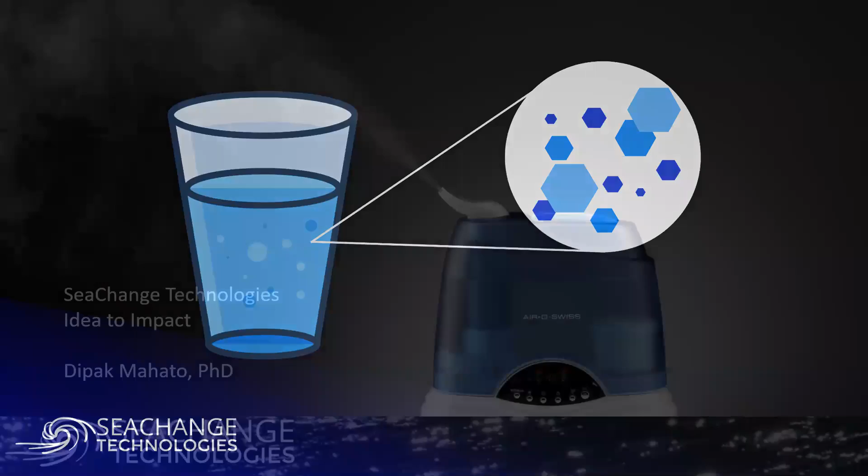What I'd like to describe to you today is a little bit about how we've taken this idea about a novel way to treat wastewater to hopefully further it along to where we can have a real world impact, delivering environmental and economic benefits to our industry. And so I'm going to focus a little less today on the technicals of how the actual technology works, and more on how we got here and some particulars about how we got this pilot going with Fashion for Good and partners.

So I started this just generally. I wanted to give a little more background on our story and how we got here, because I think we may have some very early innovators here also. But this was my first startup, and it started with an idea, as you saw. Some of you might recognize this device. This is called a humidifier, and what it does is when the air gets very hot and dry in the house, we use this thing to get more humidity. And I was just sitting at home one day watching this thing, and I had this idea about how to purify water, based on turning water into an aerosol and extracting the contaminants.

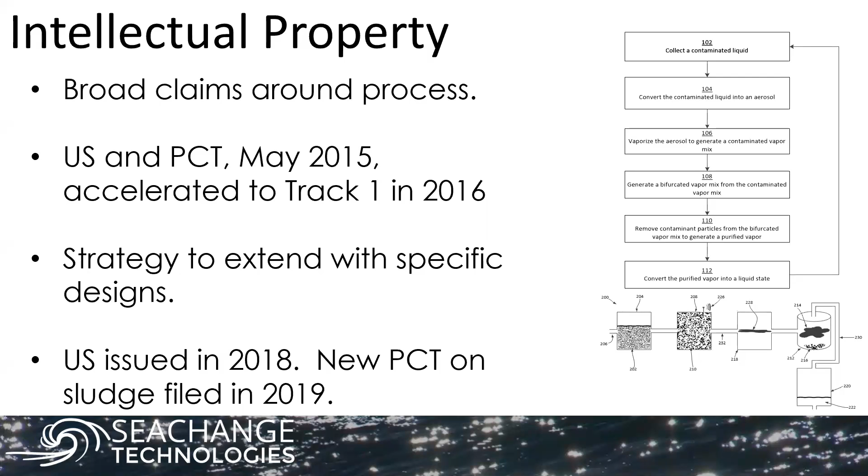And this did a couple of things. Doing this early allowed us to, first of all, the US patent issued in 2018, and we've been working on extending that IP globally and with different designs and technologies since then. And so we have a pretty strong foundation, which is great. The other thing that this allowed me to do is actually talk to people. And that's really important to get out there, actually share the idea and the technology, because otherwise you can't really dive into how this could be a viable solution for anybody. And so this was our approach to being able to get out into the real world as quickly as we could.

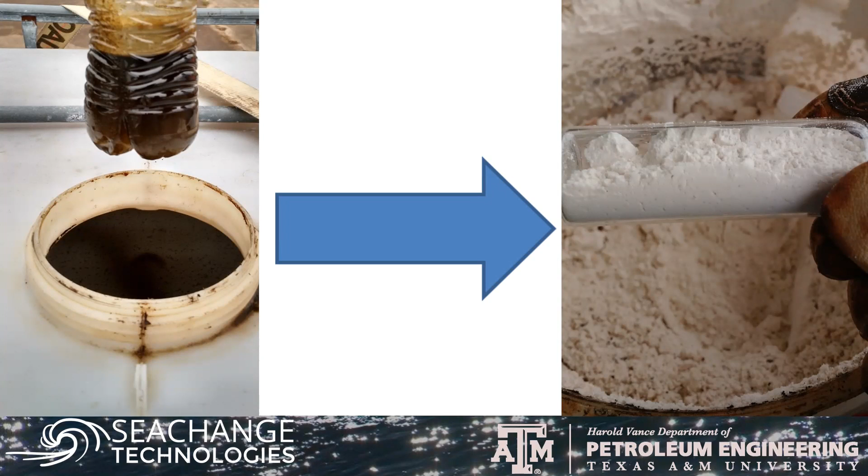Then just getting the technology actually in front of people, trying it in different industries. So obviously we're focused on apparel and textiles now. Oil and gas was one of the first ones we did, and here's some wastewater from one of our first pilots that we did in the oil and gas industry, taking that wastewater and in one step through our process, reducing it to a pure mineral solid.

And we looked at other industries as well, and thankfully we found apparel and textiles because it's fun, and they have actual funding. And so we evolved the product or the technology, starting out with little homemade prototypes from the garage, working our way up to the device, which we actually tested down in Texas, and then further improving over

years. So as you can see, the year and code name when we developed these devices, that it took us to develop this equipment to the point where we had a system that was energy efficient and capable enough and had the right throughput to get into a pilot with apparel and textile manufacturers.

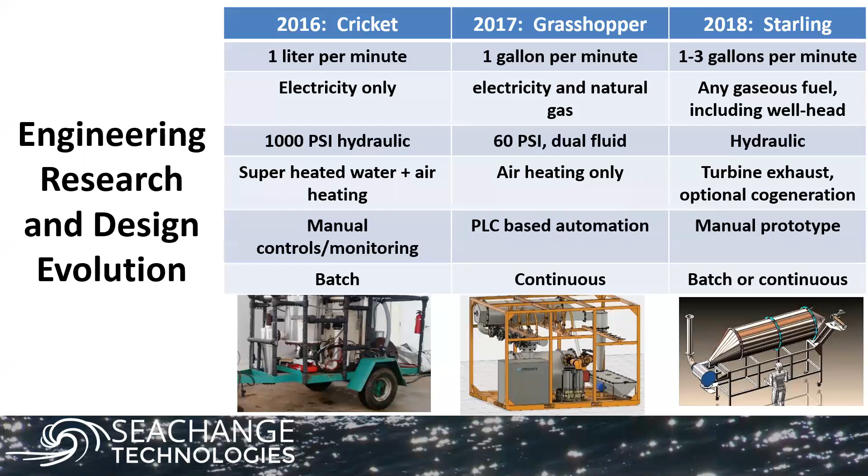A startup is a temporary organization. And so not only did we evolve the technology, the business idea, the product, the focus, but the team itself changed a lot over those years. And this is daunting and complex, how to bring a technology or what happens to a startup.

But knowing that the founding team, and recognizing that the founding team really takes different skills than the team that you might need for a pilot, or the team that you might need to pursue different markets as you explore different ways to get your solution to the world, is important. It might not be the same.

And we've all been very lucky. And so this is my current team, and the team also very much includes supporting some of the best in the world, including Fashion for Good, of course. So we've been at it for about, we're in year 6 now, with Fashion for Good, and so that's just a little background around how we got to the point where we are now.

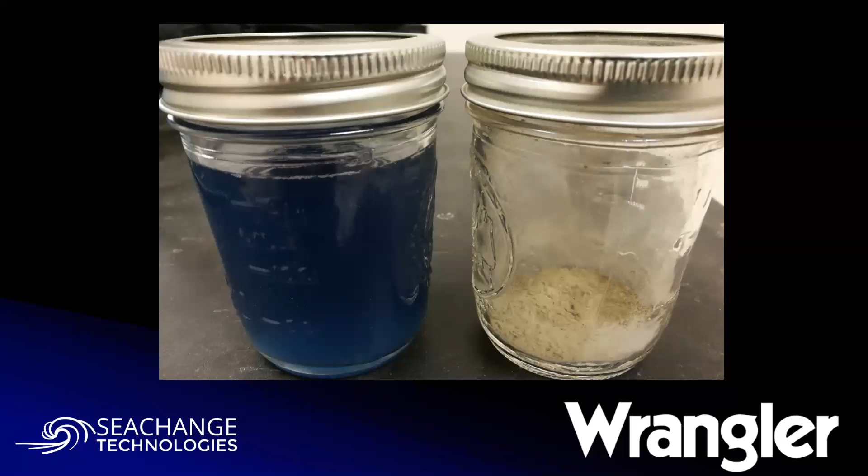And with this initial data, we were able to make some additional contacts and then got accepted to the Fashion for Good scaling program. Part of the focus of our acceptance directly to the scaling program had to do with the stage of the company at the time, or the startup, and frankly convincing them that we were ready for a field pilot trial. And so we kind of came up with this progression of how this should go.

Where are we going to do this? How are we going to do this trial? And so there's a lot of planning involved, and then execute and deliver the results. So this is what I came in with. And apparently they thought this was a good idea.

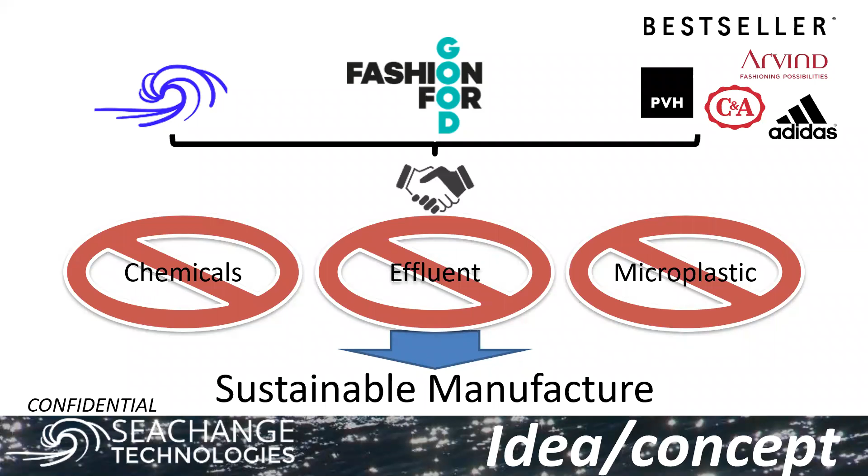These guys are pretty sharp, so not everyone bought into the pilot, but some of them did, fortunately. And so the ones that ultimately agreed to explore this opportunity further were Bestseller, C&A, and PVH, and very importantly, Arvind and Envisol, which actually joined Fashion for Good as SeaChange did, I think.

And so with these partners, at least initially on board, the goal then became to kind of design a real trial, how to get the device into the field. The nice thing about having Arvind and their subdivision, Envisol, on board is that this is an actual manufacturing supplier for these three partners.

And so part of putting together a strong trial is to have good understanding of the relationships between the brands, the suppliers, the stakeholders, which certainly Fashion for Good is a key stakeholder here. To understand the relationships, what these folks have in common, and how to make a win-win relationship where everyone gets value from the process. And the other thing here to note, these are not faceless organizations, and understanding and developing relationships with the people involved, knowing them, building trust, and keeping communication open is absolutely critical, as you'll see.

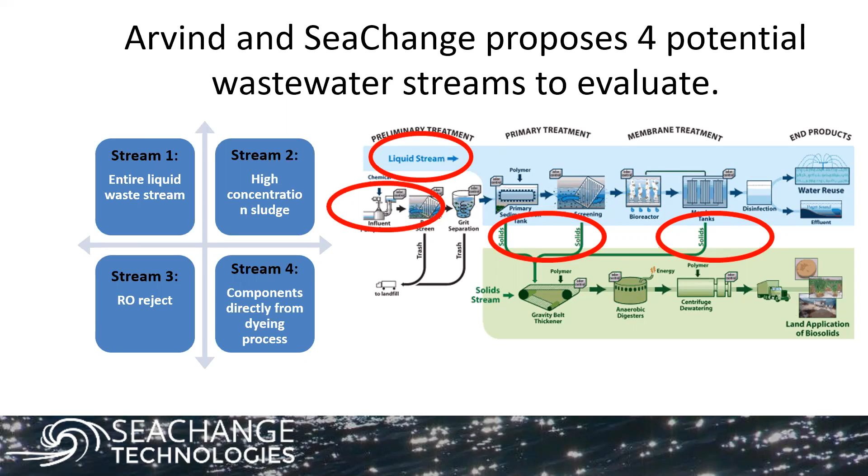And so what we did is come up with a technical work plan based on the performance of our system and the potential areas where we could add value in their wastewater treatment process and at their facilities, to come up with very specific technical goals. This is actually a map of a generic wastewater treatment facility, where the SeaChange process could fit in to add value. Then mapping out exactly how this would go, how we would run the test. What we planned for originally was a one-month trial of the SeaChange prototype equipment.

We mapped out very specific experiments that would be done with each wastewater stream, what the metrics were that we would be measuring for each of those, generally focused on environmental sustainability metrics, and money. Could we actually save them money? Projected operating costs for commercial operation as we scaled up, and other things like regulatory and operational impact and the potential of other applications.

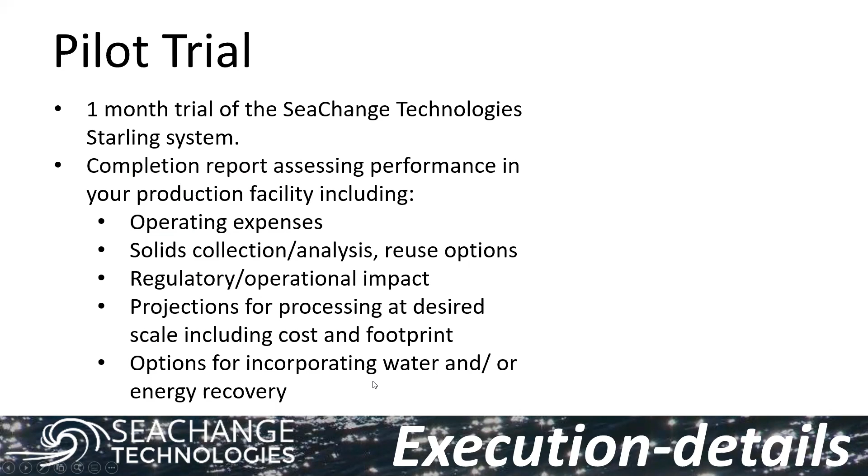So then working on the execution, when and how could we do this, in as much detail as we could. You can tell that I'm only touching on a few key aspects of this, but just to give you an idea, I can't share the actual proposal because that's confidential, but the proposal itself for this trial ended up being maybe 30 pages or something. So there's a tremendous amount of detail that goes into trying a technology like this, or introducing something new to the supply chain.

And of course, the budget. This is a pretty complex trial, and it ended up taking a lot longer than it was supposed to, which I'll get into the details of. But mapping out in as fine detail as we could the different phases of the trial, and the involvement of each of the partners and people, and their roles. So this is just the budget, but each person on that project team plays an important role. It's important to keep them engaged because they have a lot to offer.

The actual breakdown, obviously I didn't include here, but the important thing I want to point out is that SeaChange actually contributed a lot here, and Fashion for Good and the partners. But as you consider launching a pilot and engaging partners to take the time and the risk of trying out your technology, you've got to have some skin in the game. Because if you're not investing in yourself, why would anyone else? The value that you get as a startup from running a trial like this is tremendous. So invest in it. It's important.

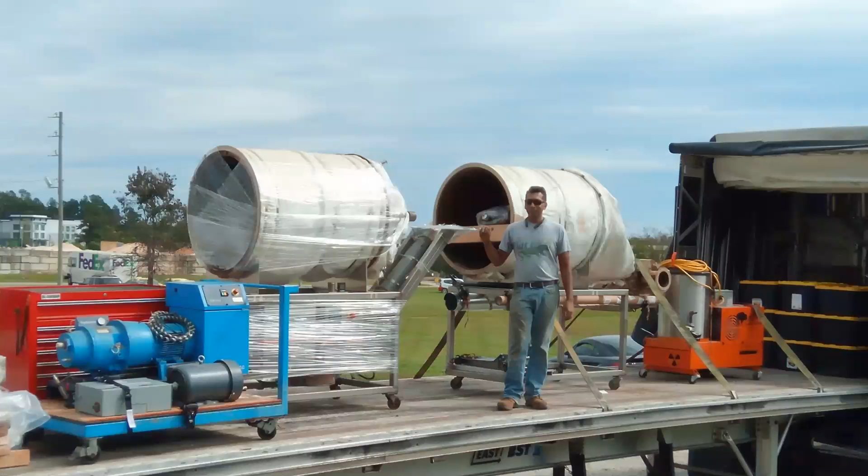Okay, so with all those details worked out, I thought, this is going to be awesome. This is going to work. So we got our equipment on a truck in a container and shipped it off to India to get the job done. And unfortunately, everything that I could imagine going wrong went wrong. Just getting around was a challenge. This is one of my best friends in India. He was my tuk-tuk driver who I met outside of our hotel. And this is us changing a tire, which happened regularly. But we had to get to the factory somehow from the hotel and keep things running.

And the infrastructure just wasn't quite what I was used to. So I had to learn a lot about the operation there, just getting around, getting our equipment there. I don't know how many of you have an industrial equipment startup, but our equipment weighs about 3 tons, so just moving it around is a challenge. The equipment was actually significantly damaged during the shipment itself, which caused a lot of issues. So there were a lot of issues with the execution.

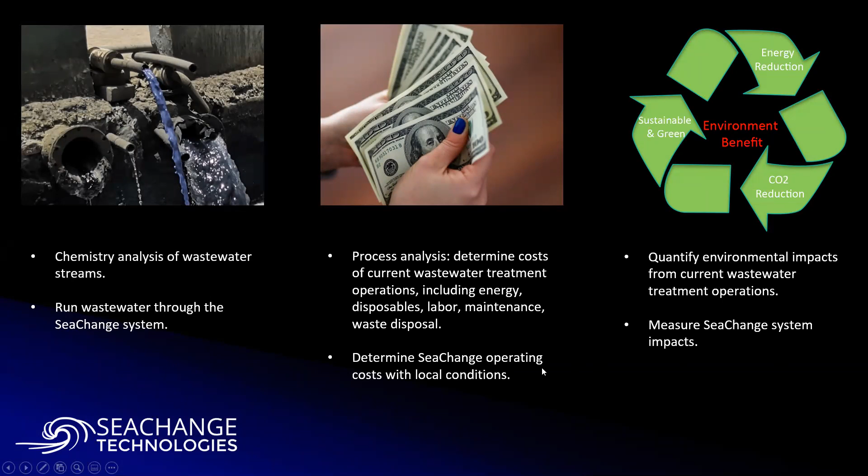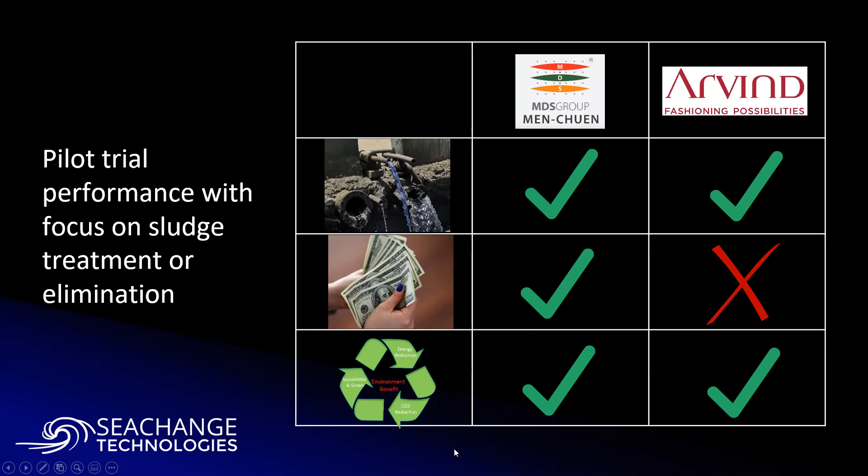But we did get through that, and ultimately were able to address the key criteria that we set out to around technical feasibility, economic feasibility, and finally, of course, sustainability metrics. This was not the only trial that we were running, and I think that's also really, really important, to have multiple shots on goal. Don't put all your eggs in one basket, because though we were able to complete the trial with Arvind, we didn't hit all the metrics. And so because we had multiple shots, we were able to find a market where we do have a good point for entry, where we can deliver all three of these things.

So kind of the next steps for where we are is to take what we learned, and again, to move closer to a repeatable and scalable business model, to take what we learned and prepare for what we hope to be our first commercial installation. And so what we learned is that before we go into an environment, we need to have a deep understanding of the supplier's operations and the environment where we're going. So, you know, what are their actual cost structures, their environmental regulations, and how can we be confident that we can hit all of their needs while still doing it in a way that we can support our business.

Once we do that, determine what metrics we can hit and tell them, because we know now what we can do in the field, and show them a proposal that says, this is how much it's going to take to operate our equipment, this is how much money you're going to save, and this is how much we're going to charge you. And then run our equipment for a month to actually demonstrate those performance metrics. And once we hit those, then convert to a fully commercial operation.